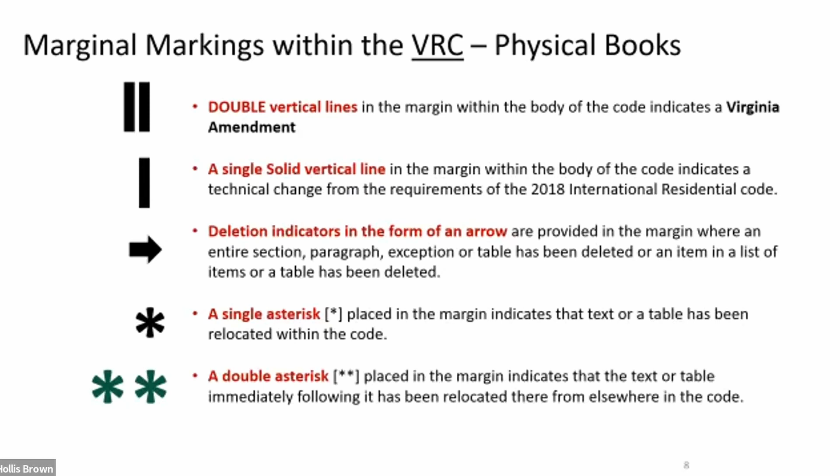If you're in the physical book, these are some of the markings in the margins. A double vertical line means that's a Virginia amendment. A single solid vertical line indicates a technical change to that section from the previous edition of the code. An arrow means that section or something in it was deleted. An asterisk indicates a table or text associated with that language has been relocated. A double asterisk, which is the first time I've seen that, placed in the margin indicates the text or table immediately following has been relocated. So that's something new.

If you're using the digital, online version, in addition to those markings, Virginia-specific amendments are shown in red type, and any changes from the 2018 International Code that weren't amended by Virginia will be in blue. Again, deletions are marked with an arrow.

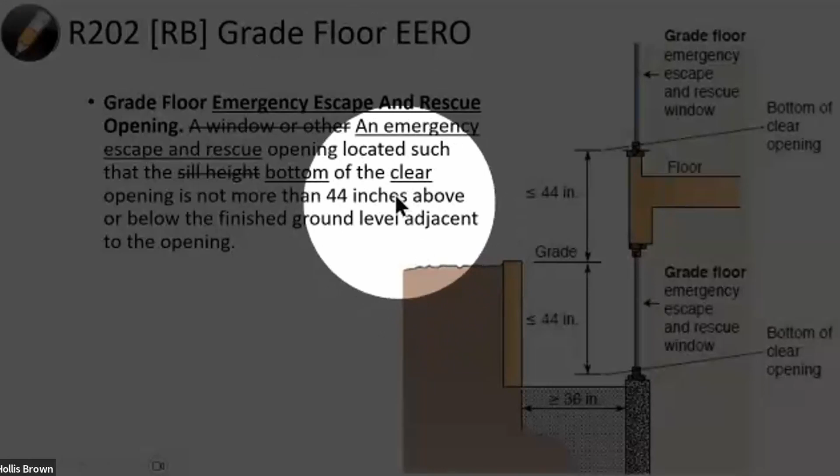All right, a couple definitions that changed. Here's what I was telling you about the language. When you look at a code change, that's what the language looks like. They will take, generally in today's technological advancements, copy and paste, then go through and underline where they've added new language and cross out old language. The pencil is a modification of the original.

Definition: an emergency escape and rescue opening, or EERO, located such that the bottom of the clear opening is not more than 44 inches above or below the finished ground level adjacent to the opening. In the 2012 code, that measurement was from finished floor to the lowest point of the net clear opening, and a lot of people tended to interpret that as the bottom of the sill, as opposed to the opening. So in the 2015 and 2018 editions, the language was changed.

That created a bit of confusion, so now they've gone back and created this language, which they claim will clarify things so there won't be as much confusion. This is in the definitions, not the technical section, but it's a good time to point out where it says less than or equal to 44 inches from the opening or the grade.

That's one of the requirements in the technical section about a window opening and what that net opening has to be. For example, if on the first floor you're less than or equal to 44 inches from that measurement to the ground, then you're allowed to reduce the net opening to 5 square foot. Otherwise, it has to be 5.7 square foot.

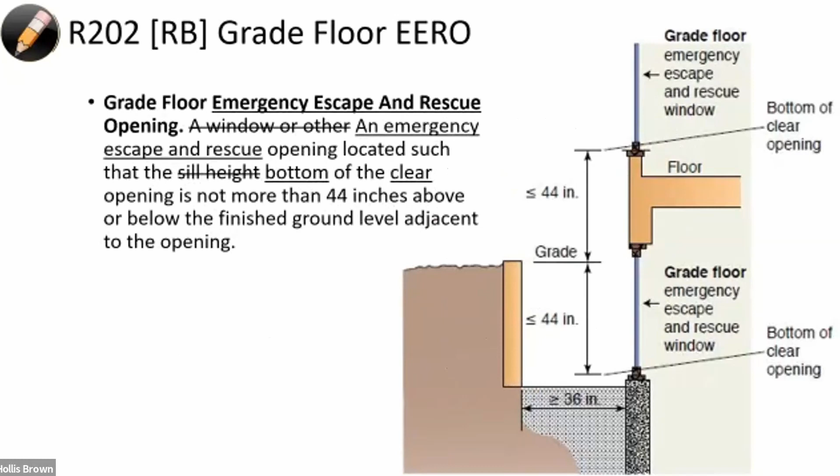One of the specifics would be, okay John, is it first floor? Is it basement? What's the distance from grade to the opening, the clear opening? Then I can answer his question. Because if I just tell him 5.7 square feet, that might be the wrong answer because it didn't take this into consideration. I know that can be confusing, and I don't want to confuse you, but I think it's important to point that out, and that's one of the slides that's good to make sure gets brought to your attention.

What I want to bring to your attention is that in townhouses, we were talking earlier about fire rated construction. In townhouses, this creates a zero lot line, so that has to have a fire rated assembly that separates townhouse 1 from townhouse 2, and the same thing from 2 to 3 and on down the line. That's called a zero lot line. There's another slide coming up that makes a change to the fire rated assembly, and I'll get more into that when we get to that slide.

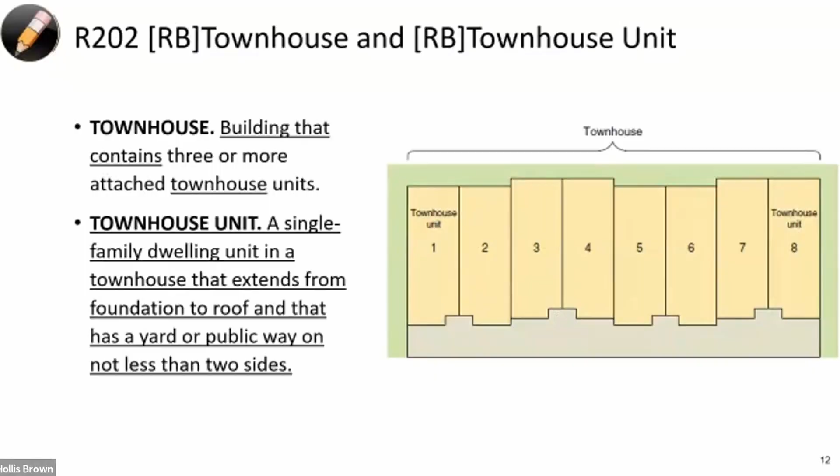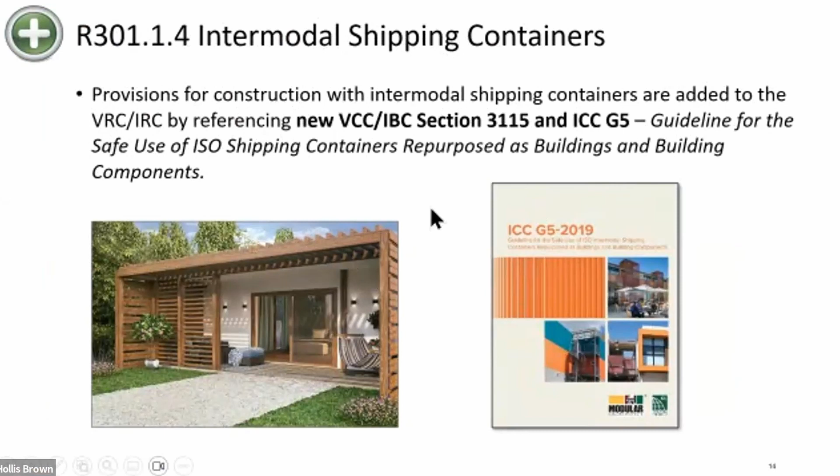It says that shipping containers used as buildings or structures shall be designed in accordance with section 3115 of the IBC, or in this case, the Virginia Construction Code, the VCC, which is the commercial version of the IBC, just like the VRC is the residential version of the IRC. One thing to note is that 'designed' means you have to have an engineer involved, so a structural engineer and architect has to design that use or repurposing in accordance with this section.

I don't know that you'll see a lot of that in Virginia, certainly not in this area. It's very costly to do that.

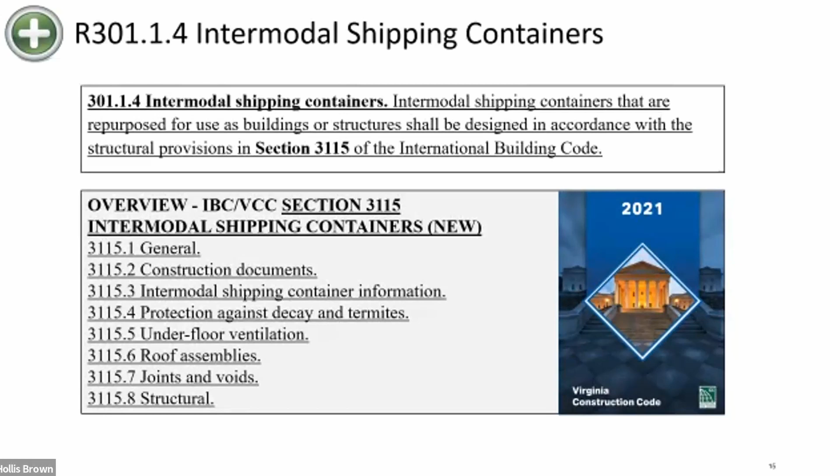I think one reason why that changed was because in a lot of localities, once you accept an engineered design - for example, in Chesterfield County, there's a builder that has a specific retaining wall associated with their poured wall for steps coming up out of the basement. They started that floor plan several years ago, and for each individual project we requested an engineered report. Then at some point our director said, well, we know what's in that report - why can't we just do an inspection based on what we now know and not require an engineered design? So in that particular case, for that particular builder, that's how we approached it.

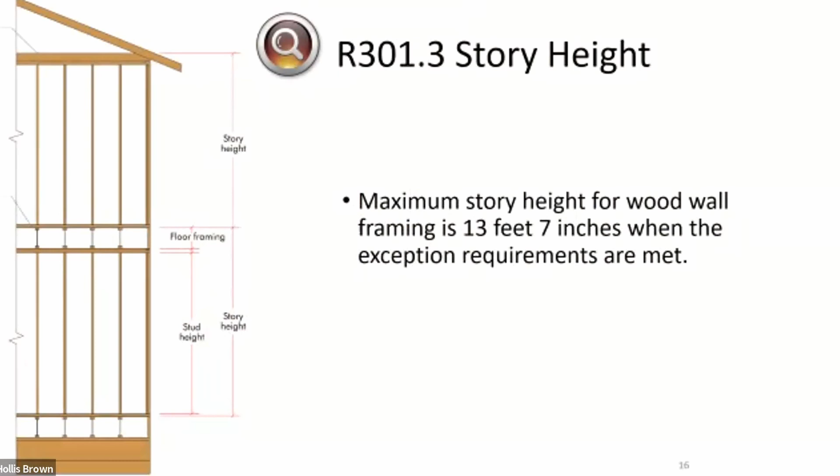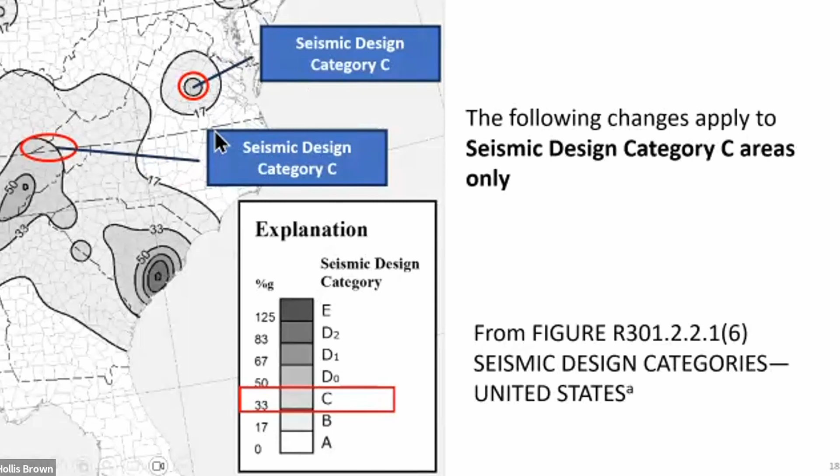This is the new change - it's a seismic category that was added. I think if you look at the map you'll see that's kind of the Louisa area - Powhatan, Louisa, Goochland, and Cumberland. Y'all remember the earthquake in 2011? The epicenter was Louisa, Mineral, Virginia. It destroyed a lot of homes. So I think that's kind of where this is coming from.

Only in townhouses, huh? That's weird. I've yet to see that, so maybe they'll talk about the old code.

Well, again, this is 2021, so if they're asking for the 2018, they would not have to do this. You might ask why only townhouses - I don't know, an earthquake doesn't know the difference between a townhouse and a single family dwelling, right? I don't have access to the actual code change, because in that they would put a reason statement, and I didn't have time to do the research. I apologize for that, but I question why a townhouse and not a single family dwelling.

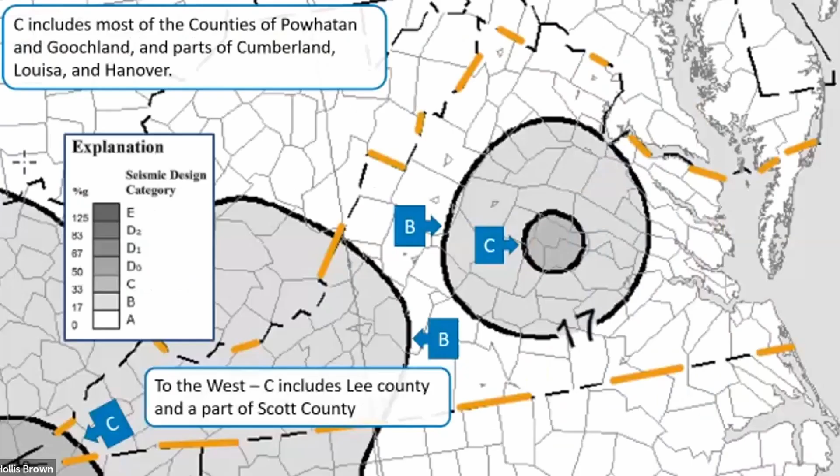In this particular instance there's a change, and that change is here. Historically, I think it was 2008, when townhouses were taken out of the commercial code, the IBC, and put into the IRC, it still required the exterior sheathing to be rated. So your firewall had to go all the way out to your exterior sheathing, and then on 4 foot of each side you had to have fire rated plywood or some sort of fire rated sheathing. Somewhere along the line that exterior sheathing requirement in the residential code only was taken out, so then your firewall just had to extend all the way to the exterior sheathing.

So now this is a subsequent change that says your rated assembly, which typically is core board - 2 layers of 1-inch core board - doesn't have to go all the way to the exterior, providing you do this 2-inch nominal lumber in that scenario.

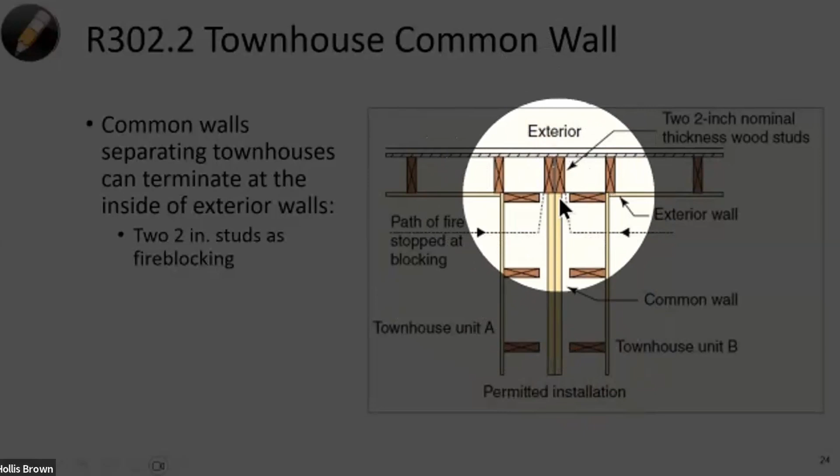Currently, under the 2018 code, it just has to be a solid metal door with a minimum 20-minute rating. If you're familiar with fire rated products, not much of anything is 20-minute, everything's 30-minute or greater. So typically the solid steel door you see in most new construction is a 30-minute door.

Now it has to not only be that fire rated door, but it has to be self-closing and self-latching. We were talking earlier about the commercial side, where now when you do something like this, all of your hardware, including the closure, would have to be rated as well. In this particular case, you don't. The code is kind of silent on that. So the code heads seem to say, well, since it doesn't tell you, then it's not required.

So the door has to be rated, meaning you can't have any glass in it unless it's wired fire rated glass, no openings. It has to be solid, and now it has to be self-closing and self-latching. And it doesn't give you... I think this is a mistake on their part, because it doesn't give you a timing for that self-closing, self-latching.

In 2018, the previous edition, they stepped that up. The problem they discovered was that if the whole house exhaust is on the other end of the home, and you don't have a window...

Sorry about that, I set my alarm. I don't know what's up with that. If you didn't have an operable window in the kitchen, then you were going to pull that exhaust and that fume from the kitchen all through the house.

So the 2021 code says that you have to have a whole house mechanical ventilation system, or a mechanical ventilation system capable of producing the required air changes in habitable rooms.

So you've got a choice now. You can either do a whole house system, or, using the kitchen as an example, you still have to do the whole house, but you can put a range hood that will exhaust the kitchen fumes and cooking odors and you'd be okay. Or you could do a ventilation system in each habitable room. Now, who would do that? I don't know, but that option is there.

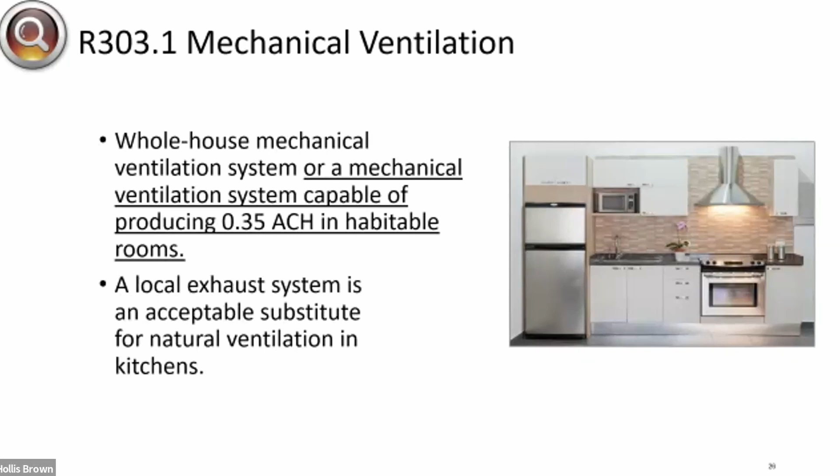So Larry, we got a question from the peanut gallery. Peter Onsbach is asking about it. Is this a code? He asked this when you had the previous slide up about garage doors. He wants to know if this is a code only on new construction. Yes, only on new construction.

If you remember in your NRS class, chapter 1, which is the USBC, the administrative portion, there's a section 102.3 I think that talks about the scope of the code. It tells you in a paragraph that this code, in this instance the 2021 code, applies to buildings and structures built now, new construction. Down at the bottom of that paragraph, it goes on to say, and this has always been in the code, even going back to the CABO days when I first came with the county in the early 90s, that however, if a home or structure was built under a previous edition, then as long as that hasn't been changed, it only has to meet the requirement that was in effect when that home was originally built.

And so if you go back in and you're going to replace like for like, you don't have to meet current code. You only have to meet, which would include maintenance, the code that was in effect when that home was originally built. We get a lot of complaints when it comes to re-roofing, replacing windows, because a lot of homes 20, 30 years ago didn't require, especially for re-roofing, drip edge or ice and water shield. So a lot of your contractors now, when they do a re-roof, meaning a tear off, they want to add in all of that.

And the insurance companies aren't paying for that because they've gotten wind of the fact that in the Commonwealth of Virginia, we have what we call a no retrofit clause, meaning as long as you're just repairing, maintaining, not adding on, not completely gutting the home and renovating it, you don't have to ever make it come up to meet current code requirements. You can just put stuff back right like it was. In the case of windows and doors, water heaters, furnaces, you might not be able to find that exact item, you may be forced to do something 90 plus or 95 plus efficiency.

But chapter 1, so having said that, long story short, this only applies to new construction. It does not apply for remodel. Now, there is a slide that's going to contradict that, and I'll leave that up to you when we get into the emergency escape and rescue opening stuff. But the answer to the question is, it only applies to new construction.

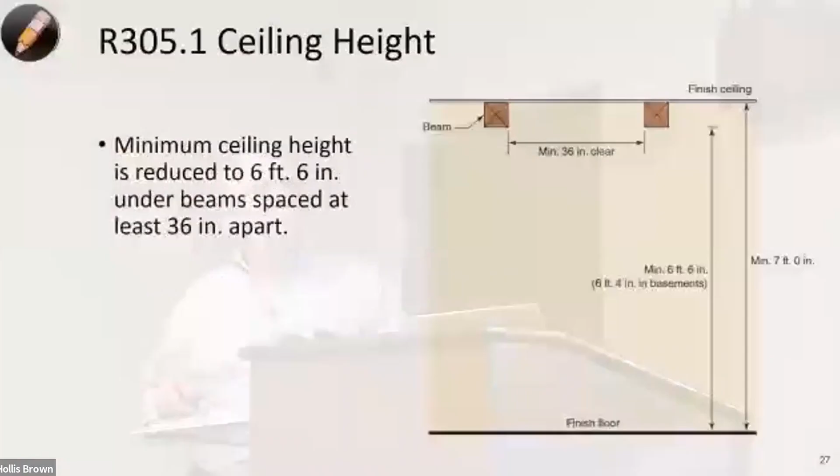All right, this is a requirement that has kind of been monkeyed with and changed. Prior to the 2000 edition of the code, ceiling height had to be 7 feet, but it did allow beams to project 6 inches below that ceiling height, provided they were at least 4 feet apart. Somewhere along the line in 2015, that exception included all areas, basements, finished, unfinished, or whatever.

So this requirement changes that to the minimum finish-to-finish horizontal dimension between the beams is 36 inches. And it notes that this requirement doesn't include basements, because that part of the exception in basements didn't change. So it doesn't matter whether it's finished or unfinished. If it's a basement, you can still get by with 6 foot 4 inches, and you can have the projections below that, but everywhere else, it has to be 6 foot 6 inches.

Now, let's take this a step further and piggyback on what we were just talking about, the no retrofit clause. Let's say a home was originally built with an unfinished basement, and now they want to come in and finish it. More than likely, the locality is not going to make them meet this requirement. They're probably just going to let them encapsulate whatever's there, ductwork, beams, whatever, and be done with it, even though it's now going to become finished space. I'm not speaking for localities, I'm just saying that's probably what's going to happen. They're not going to make them tear out the floor system to make something existing comply with the new code.

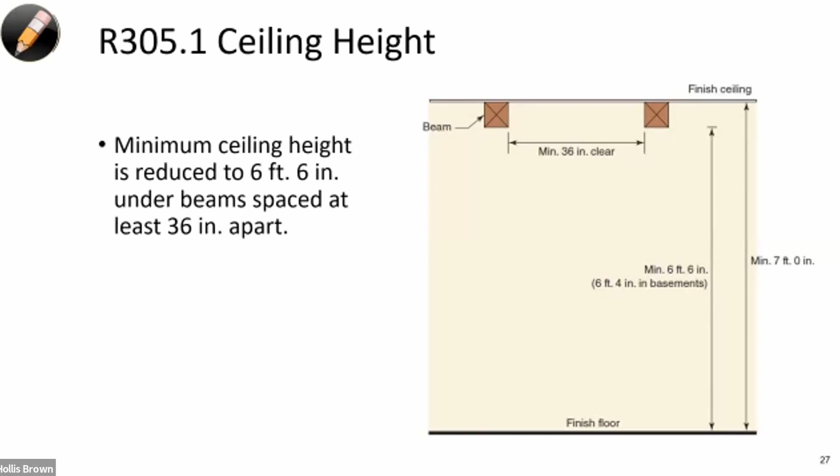This is a change. Emergency escape and rescue opening requirements. Emergency escape and rescue openings are now required to have an unobstructed 36-inch wide path to a public way.

This is a significant change to the residential code, because up until now the code in chapter 1 has only given authority for buildings and structures. So if you're out in the yard, you're outside the code unless you can determine it's a building or a structure. A good example: a pool is considered a structure, but a retaining wall for landscaping purposes, as long as it's not supporting the pool or any other structure, is just considered landscaping. It's out in the yard, it's just landscaping, no permit required, it's exempt.

So now we're reaching out beyond buildings and structures, and we're saying you have to have a 36-inch wide path to the public way. The definition of public way is a street, alley, or other parcel of land open to the outside air, leading to a street that has been deeded, dedicated, or otherwise permanently appropriated to the public for public use.

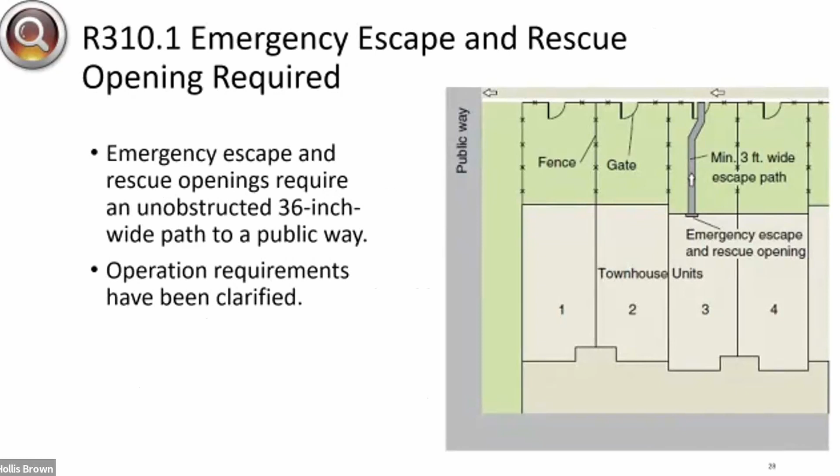All right, so this is just some additional language about that emergency escape opening. Now, under decks, porches, cantilevers, anything that could vertically obstruct, you have to have a path that meets that requirement: not less than 36 inches in height and not less than 36 inches in width. So that coincides with this—when you come out of that emergency escape rescue opening, you have to have an unobstructed 36-inch pathway to a public way.

So now if you're in a basement or coming out under a deck or something, that opening has to meet certain requirements, especially on the width, that coincide with that minimum 36-inch wide pathway to the public way.

And explain why they have an escape window in the basement where they normally have a door. Say that again, please. So their code is set up so that it's for a window coming out the back of the structure, correct? Out of the basement below ground. But normally in every townhouse I've ever seen, there's a back door on that level, which would be your emergency escape.

All right, so EERO, emergency escape and rescue opening, is not associated with all habitable rooms. It's typically associated with bedrooms, sleeping areas. So an EERO can be either a door or a window. If you have a bedroom in the basement that's open to that door, you can use that door as your EERO. But if you have a door on that bedroom that separates you from the main area leading to that exterior door, now you have to have an EERO in that sleeping room.

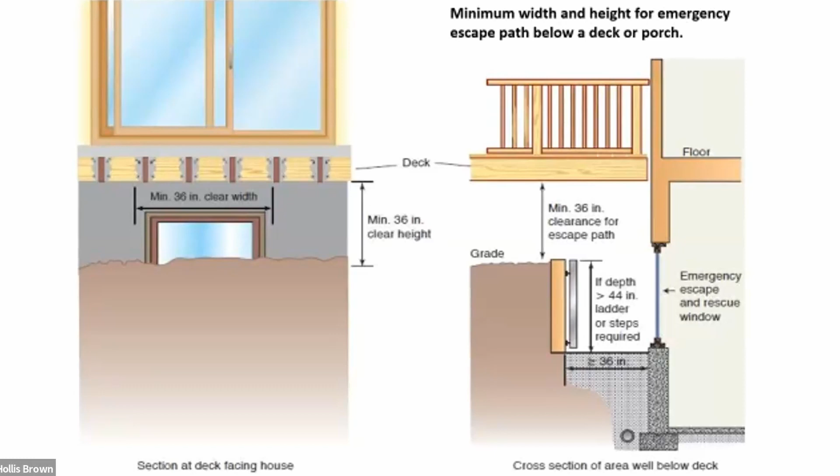All right, so this is talking about area wells, again, EERO, emergency escape rescue opening. Now they have dimensions for steps. The building codes typically said that you could have a well with a ladder. Now I guess this is kind of a modification so that now you can do steps, providing the steps meet these dimensions.

And again, there's that 44 inches that's showing up. No, sorry, there's the 44 inches, only this time it says greater than 44 inches, you're required to have a ladder or steps. So if you're less than 44 inches, that tells me that you wouldn't need something like this because somebody should be able to navigate up and over that without too many problems.

So be careful with this because these dimensions for steps or stairs are different than what you're going to find in the egress section 311 of the code for every other area that's associated with stairs and steps. So this is not main egress, this is just emergency egress.

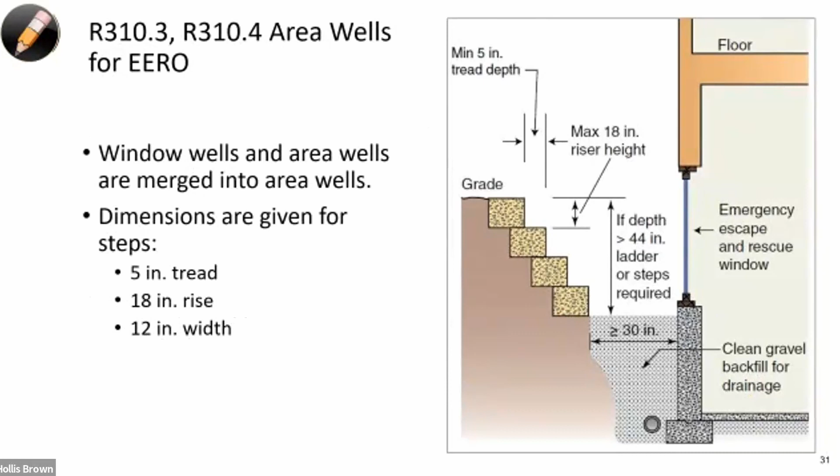You can't apply that to new construction, and I'm not so sure that this isn't going to get challenged because let's say I have an unfinished basement, and now the homeowner wants to come through and finish off that basement and make it put a bedroom down or a sleeping area down there. Currently, we require them to meet the other EERO requirements. This is now saying that in existing buildings, when you're doing remodel, you don't go to the section that requires either 5 square foot or 5.7 square foot. You're allowed to get by with 4 square foot.

But again, that's kind of in conflict with that chapter 1 that says, as long as you leave that structure in its original existing condition, you never have to make it meet current code requirements. Which flip side of that says, if you change something, whatever you change now has to meet the current requirements, meaning an addition or an unfinished space that's completely finished off. Unfinished meaning it's wide open, no walls, no barriers. Now you come through and you finish it off, you make a rec room, you put a bathroom down there, you put a sleeping area, et cetera. That's not existing, that's new construction. That's a change, change of purpose, change of use.

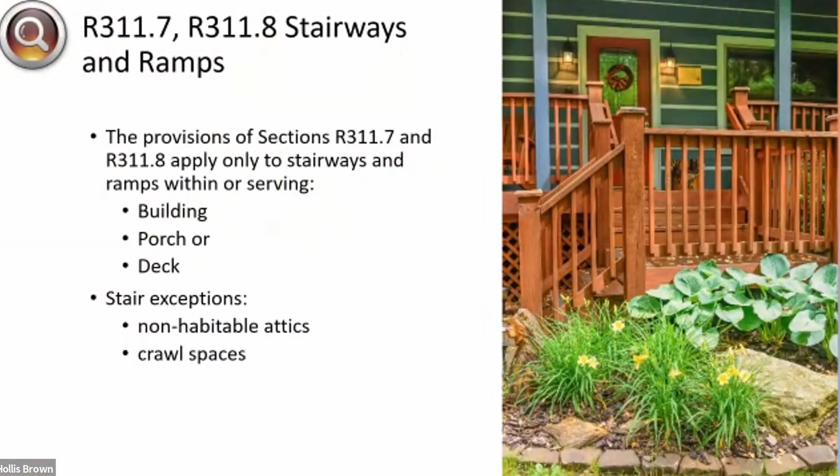This is a new exception that allows steeper slopes for exterior landings that serve to drain surface water away from the building. Previously, the landing that's required at the bottom of the steps at the grade could be level. Now it's going to require a minimum of 2% slope so that water runs away.

And back to that comment that I just made about buildings and structures, typically this is where the scope of the building code and the code enforcement personnel's authority stops, right there.

Window fall protection. Tim, you got your hand up again. What's that? Tim Fisher's got his hand up again. I apologize, I thought it was lowered.

All right, window fall protection. Early on, I mentioned less than or equal to 44, or greater than 44. So when John calls me and I need more specific information, this is what I'm talking about. Where's the window located? What's the distance from the opening to grade? So I'll know which section applies.

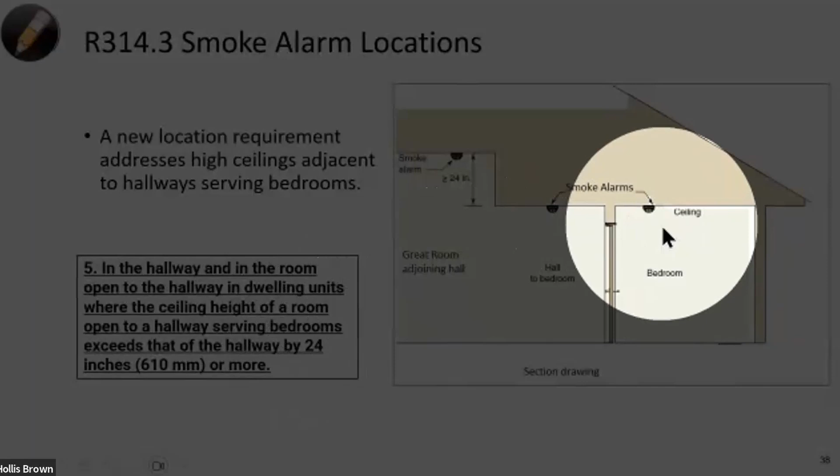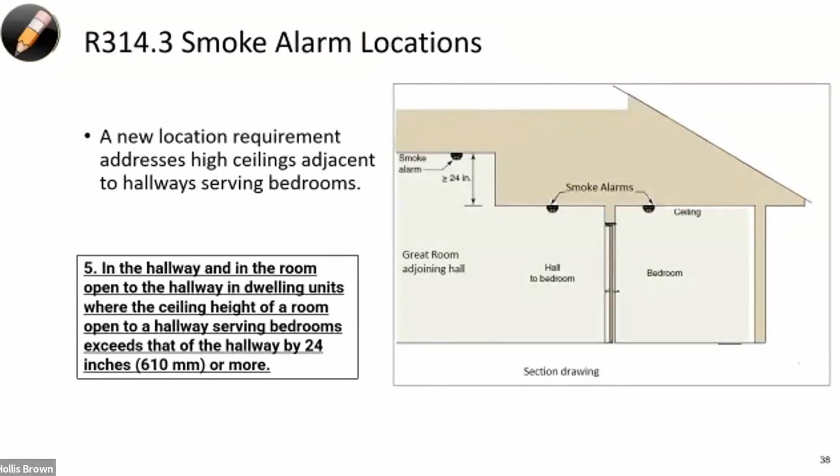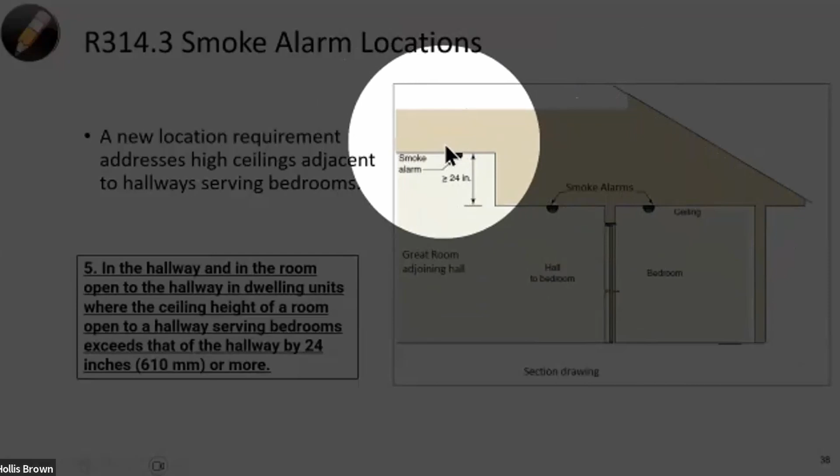Smoke alarm locations. This is an addition under the 2018 code. If it were a sleeping area, this says bedroom, but if it was a sleeping area, you would have to have a smoke detector inside that bedroom and outside adjacent. This section is now stating that if you have a hallway of some sort, and then you've got a larger opening greater than or equal to 24 inches for the room adjacent to that hallway, you now have to add a smoke detector at the highest point of that ceiling. So the way that would read is: you need a smoke detector in the bedroom, you need a smoke detector outside that bedroom door, and you need a smoke detector at the highest point of the ceiling of the great room.

Smoke alarms near cooking appliances. This is just kind of a change in the language. I'm kind of surprised to see this because the code has, over the cycles, gotten away from having requirements about smoke detectors and appliances, and it just says per manufacturer's installation instructions.

So now they've got a specific requirement that it's not permitted to be as close as 6 feet from the cooking appliance. So let's say you go out to do your new residential inspection and John goes out to do his inspection. I've come along and approved that because of this, but I didn't have access to the smoke detector installation instructions. John does, and John puts a note on his report that the manufacturer instructions say it can't be within 6 feet. If John wants to call me, I'll have a conversation with the builder; if not, that's something that could be handled between the buyer and the contractor. But typically, if there's a conflict between chapter 1 and the code, the most strict or stringent requirement takes effect. In this case, if the manufacturer specs say you can't be within 6 feet and the code says yes you can, I would probably tell the contractor, well, John's right - the data from the smoke detector manufacturer says you can't comply with that.

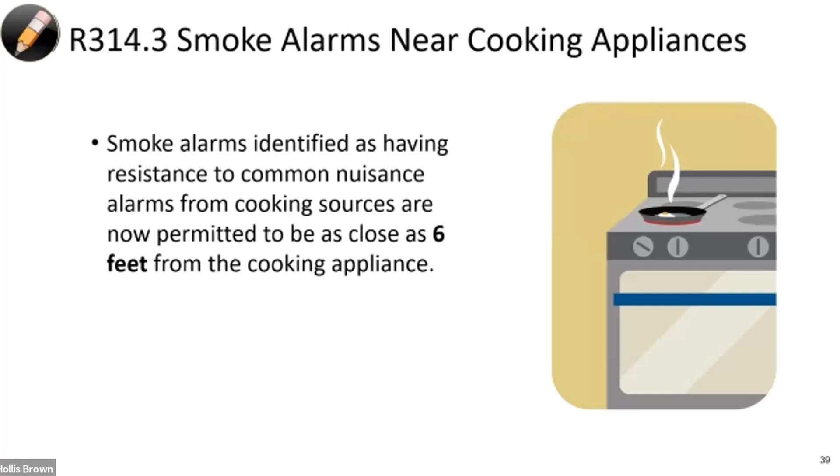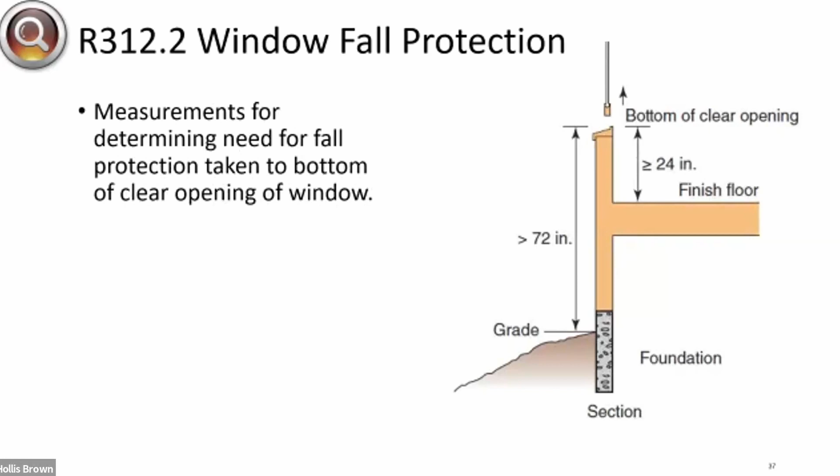Protection of wood against decay. This was clarified. The notes say that this particular section has not changed significantly over many code cycles. This update accomplishes a much needed overhaul, clarifying the requirements, cleaning up errors in syntax, and correcting some spelling and misleading text. So there are some areas and sections that have been deleted.

I've got a diagram in my notes. I don't know why the diagram's not showing up, but...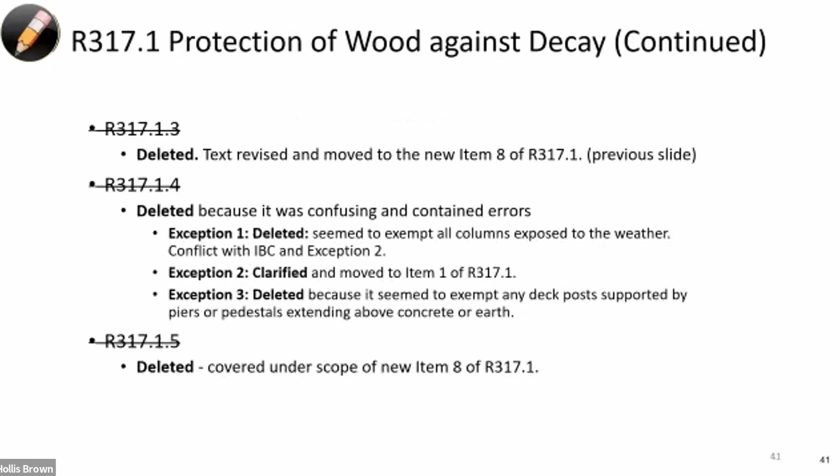The notes say that generally IRC buildings, residential buildings, do not require accessibility, and accessible features are optional. I wanted to point out that accessibility is different than the interior passage requirements found in section R332.

So when you're talking accessibility, it's ADA, handicap, full-blown kind of stuff. That's the definition of accessibility - federal code stuff, ANSI, stuff like that. Interior passage is something different, so don't confuse the two.

You know what I'm talking about when I say interior passage? There's a section in the same chapter, chapter 3, that says that if you got a bathroom located on the first floor, then you have to have a minimum 2/10 door to get into that bathroom. That's not accessibility, that's interior passage requirements.

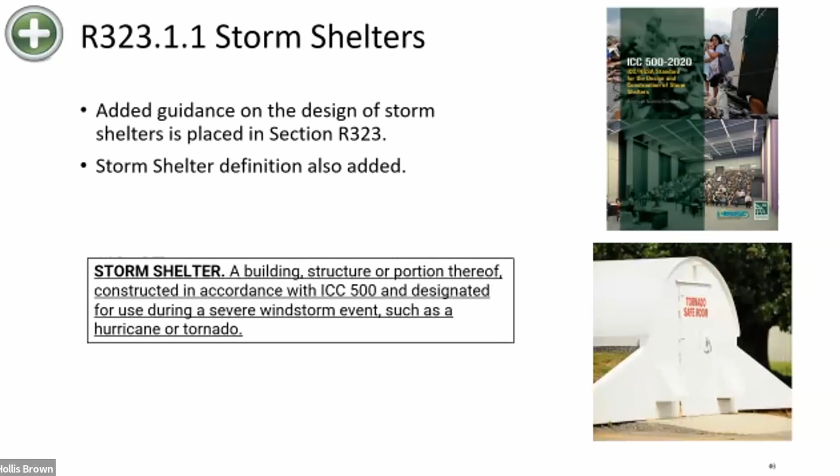There are some changes in this current code that wasn't in the previous code about fire department access that reduces some of the clearances. But with the advent of more and more people wanting to go green or get off the grid or whatever it is they're trying to accomplish, this section is becoming bigger and bigger. So keep an eye on this section if you're going to get involved in this, because there's some significant changes happening.

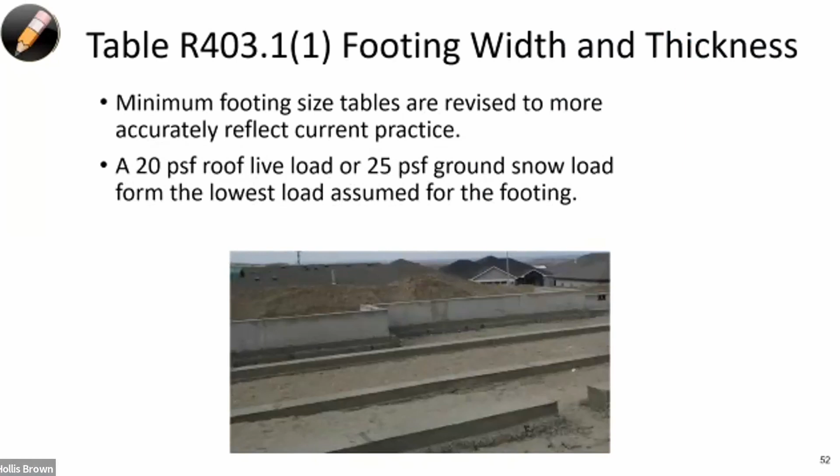Foundations, footing width and thicknesses have changed. A review of underlying calculations found minimum widths and thickness where loads assumed were incorrect. Therefore, the table has been changed. That's the table.

Keep in mind that this is for houses, additions. It's not for decks. There's a change in the table for decks too - we'll get to that shortly.

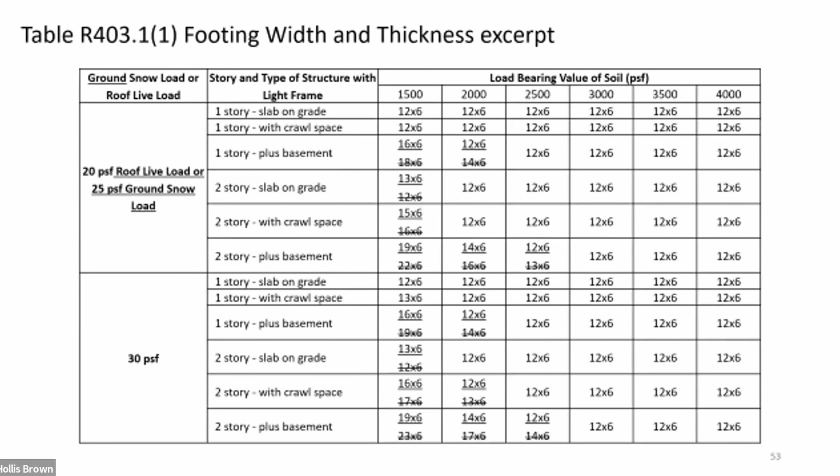Foundation waterproofing. There have been some deletions here. In the approved products column, 6 mil polyvinyl chloride and polyethylene products have not proven to possess the thickness or strength to be effective and durable, so they were deleted.

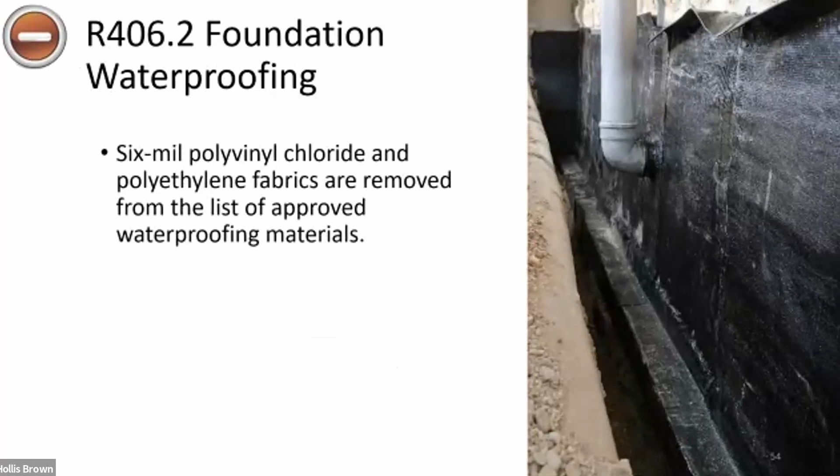Chapter 5, floors. Vapor retarders under concrete slabs, the minimum thickness has gone from 6 mil to 10 mil. Be careful of the requirements in the code because there are locations that are exempt from this - for example, garages to include attached garages. It's not required to have this. Utility buildings and other unheated accessory structures - most builders will put that poly down for an attached garage, but because it's an unheated surface, it's not required.

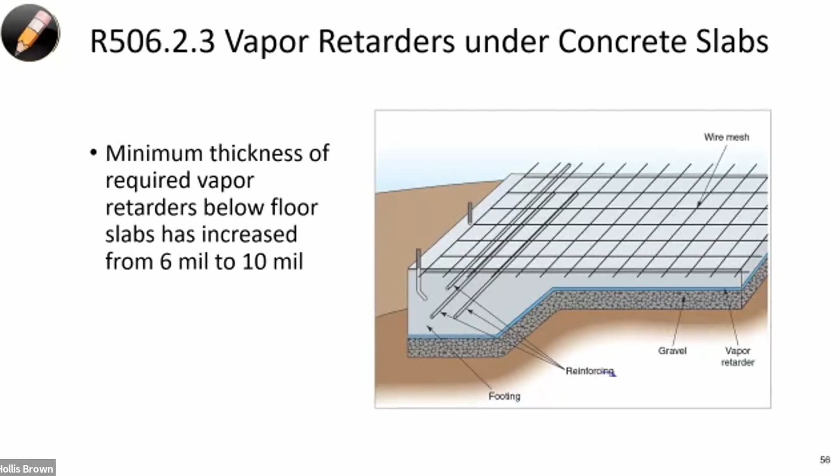Here's the deck footing requirement. In my notes, it says that there are 2 exceptions. Exception 1, joists supported on grade do not require footings. Most localities, I think, would consider that a patio. So we've just kind of let that go.

You don't even need a permit. So you build a wooden deck right on grade. Now, the code says, okay, we recognize some are going to do that, no footing required. Exception number 2 says a small deck low to the ground may use concrete piers as footings directly supporting the joist on grade. I think that's going to cause a lot of problems because what's the definition of a small deck low to the ground?

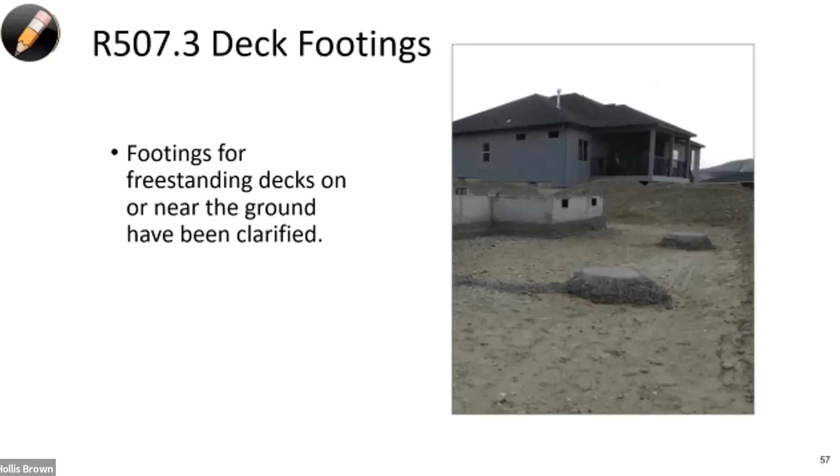I bet if you polled everybody listening to this, you'd get however many people in this room plus the 39 people joining us online, you'd probably get that many opinions, like 42 opinions, about what a small deck low to the ground is. So I think that's going to be a problem.

So when you encounter that under the 2021 code, I would encourage you to contact your local building inspections office and ask what their definition is. And then let that drive how you look at it.

How many know what tributary area is and how to calculate it? The definition of tributary area in square feet is different than just tributary area — you take the measurement halfway from one support to the other, then multiply that by the width, and that's your tributary area in square feet. That's why I think this table is going to cause problems, because I have trouble calculating that myself. How's a contractor going to calculate it?

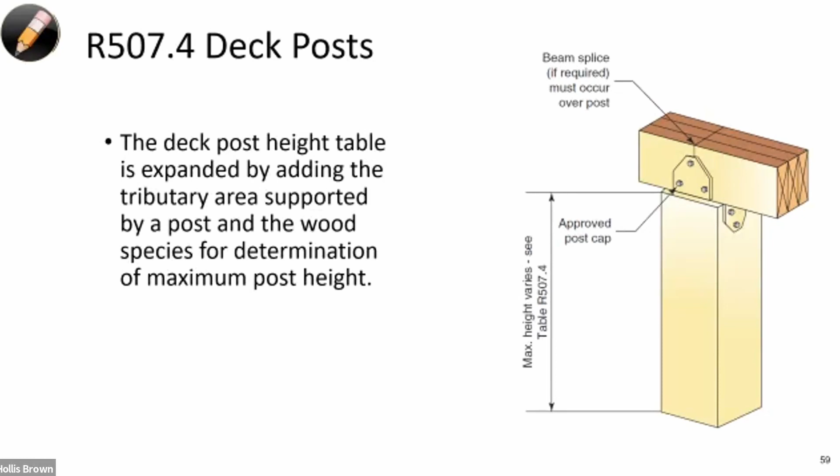To understand the prior point, if you had your small low-to-the-ground deck, whatever that is, you don't need a proper footer pier — you can just buy some piece of concrete and plop it on the ground. Yes, that's what this is telling you.

It's amazing. Well, that's a good point, back to Chapter 1 and the regulatory authority. We, the inspection staff, boots on the ground, don't write the code — we're required to enforce it. And there are a few things that have come along in my 30 years that I haven't agreed with, and I've been told point blank by my supervisors and my boss: I don't care whether you agree with it or not, it's in the code, you will enforce it. Or it's not in the code, so you can't enforce it.

I should have brought along a copy of the code book that was in effect when I first went with the county back in 1992 — it's about that thick, and oh by the way, it's only that. Well, look at this code book now. I don't know how many times that code has grown. There's a lot going on in that book, a lot that us and y'all have to be responsible for if you're going to do new residential structure inspections. And when you've got 116 new requirements from one code edition to the other, it's getting to the point where it's unmanageable, I think. Which is another reason why I decided to hang it up.

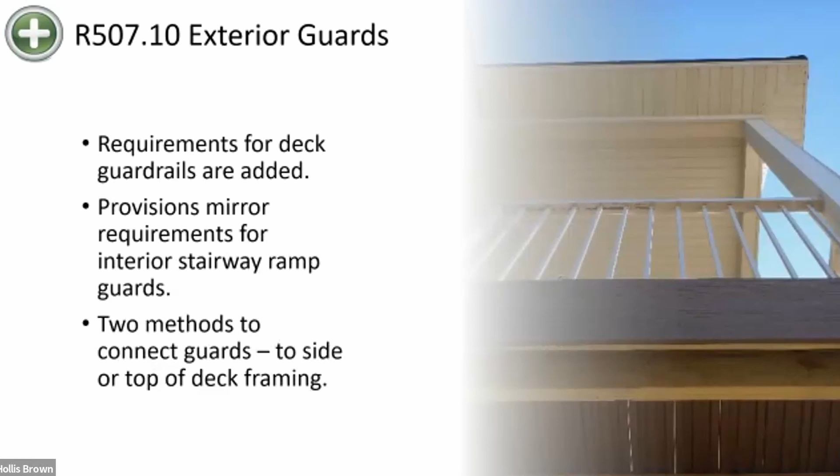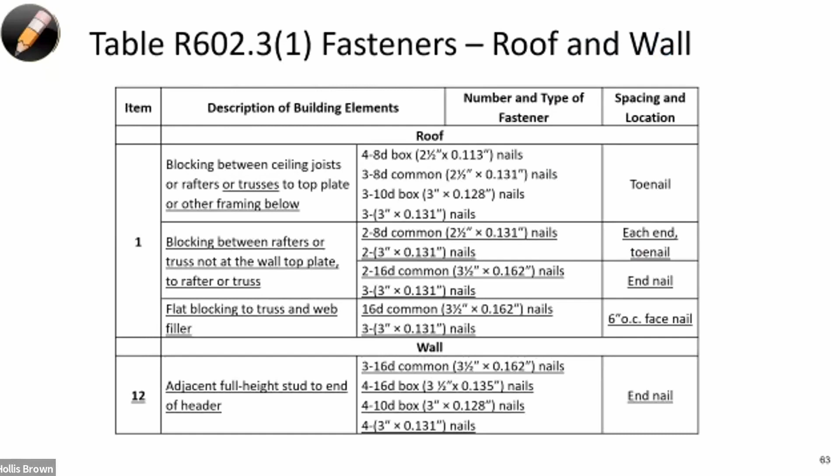Wall construction. There are some changes to the table for fasteners for roof and wall. This particular table addresses wall, and this particular table addresses roof sheathing.

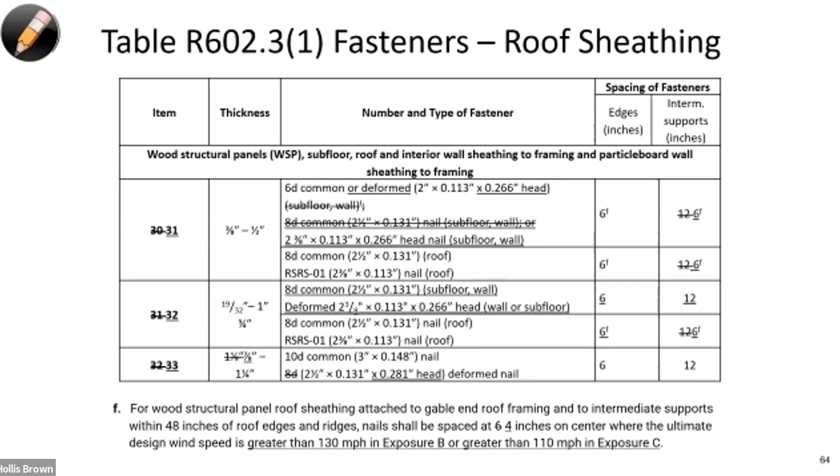There's a change to the cripple wall requirements. Cripple wall requirements only apply to exterior cripple walls here.

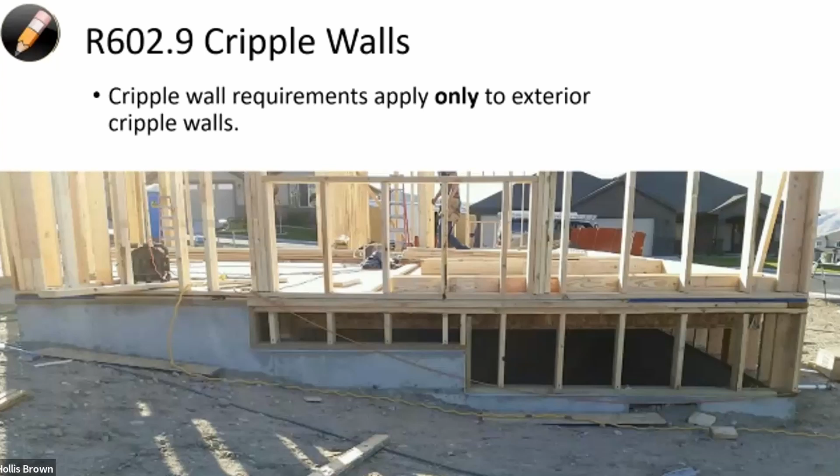The notes say that the requirement for continuous sheathing on cripple wall studs with a height less than 14 inches is intended to ensure the integrity of the studs when nails are end-nailed through the top and bottom plates. I'm assuming the reason they now want that is because of racking and lateral movement, to stiffen up that wall so that doesn't happen.

Wall coverings, this says I'm halfway through. I'm supposed to wrap this up at 9:45, right? You have 20 minutes. All right, let's see what we can do.

Vapor retarders. It's been reorganized to clarify and ease of use. The one thing I want to point out is, for the most part, we're in region 4.

I've got a slide coming up that shows there have been additional regions added to Virginia, but vapor retarders are not required in the Commonwealth of Virginia for the most part in region 4. The purpose of a vapor retarder is to go on the warm side so that it prevents moisture from moving through and meeting up with the cold air.

Well, in this area, region 4, we pretty much have equal heating and cooling days, meaning half the year you've got the air conditioner on, the other half you've got the furnace on. So there's really no need for a vapor retarder, because if you're going to go by the logic that it has to be on the warm side, half the year it needs to be on the inside, the other half of the year it needs to be on the outside.

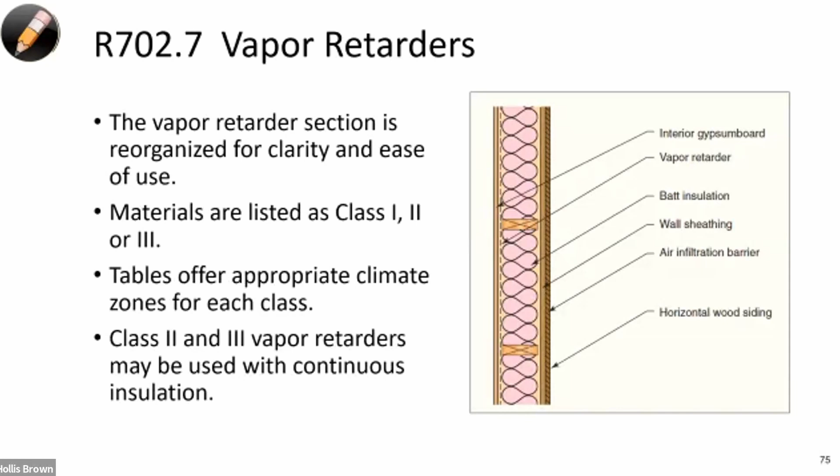So that's Tyvek paper? Nope, Tyvek is an air barrier. So you're saying tar paper? Tar paper, plastic, roll-on membrane, anything that is moisture impermeable. It won't let moisture through.

The problem is a lot of contractors try to use Tyvek as part of their flashing, but Tyvek lets water through. I've never understood how it can let water through but not let air through. On a personal note, we require them to put Tyvek or house wrap.

Tyvek is like Xerox, it's a proprietary word. We require them to put house wrap, then we allow them to put all these massive staples and fasteners. So what good is the air barrier doing, right?

What's that? Tyvek says you have to tape them. Yeah, well, how many people are going to tape all those fasteners, right? You can hardly get them to tape the seams. You're also not allowed to staple it anymore, you have to use one of those cap nails, again per manufacturer's installation instructions.

This is just a slide that describes what class 1, class 2, and class 3 is.

Tie attachment and airspace. There's a slide coming up that would probably better explain this. You're probably not going to see this in residential construction, primarily commercial construction, because the reason for this change is to increase the gap behind the airspace between the veneer and the substrate or sheathing, so that you can install insulation to get your R-value requirements and have it on the exterior of the building, not the interior. And if you notice, there are a couple other changes on this diagram.

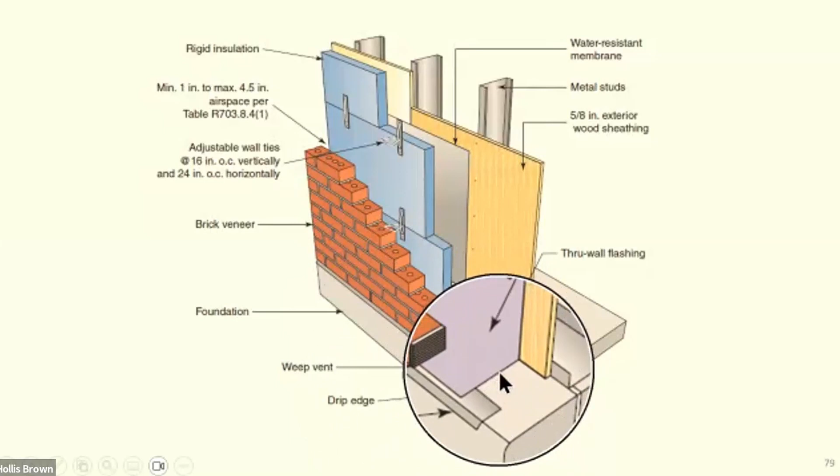Nobody in the residential world uses this, that is a commercial product. And then how many contractors are going to have the forethought to increase their projection on their footing to include all this additional, right?

So I don't think you're going to see this residentially unless you've got a high-end builder, or unless you're in an area that is trying to obtain some sort of green energy requirement. And the only way they can do that is by putting foam board on the exterior.

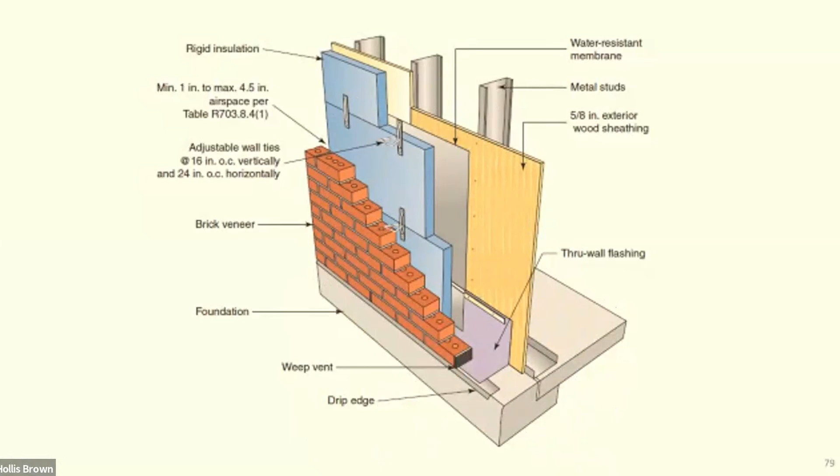Soffits, requirements for soffits have gotten more stringent. There's a new section, and here's the overview of that.

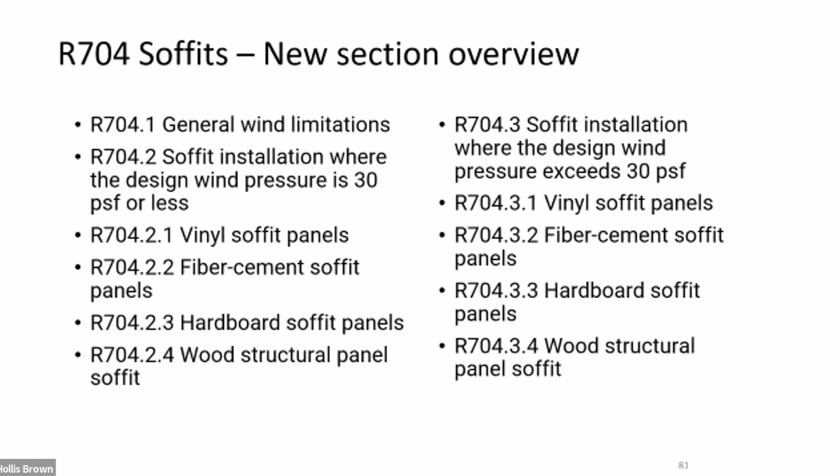This has been generated because of the study in high wind areas, that as long as the building stays intact, it will resist the wind and the forces. But as soon as you start to remove cladding and allow wind into that building, you're starting to cause a problem. So in the notes, it says that in the study, there's been a lot of soffits that have blown out, which allowed wind to get in, and then the building just kind of implodes or explodes. So here's an example of what's required now.

All right, Larry, you got your hand up. Yeah, so are you saying that a porch roof with a vinyl roof, vinyl soffit, has to have solid sheathing? When you're up in the attic, you can't see that white glowing, just plain vinyl, and there has to be solid sheathing there?

No, that's not what this says. What this is telling you is that you can't just put a piece of J or F channel up and pop your siding in and let it just kind of float freely. That siding has to be secured, or that soffit has to be secured now.

And the only way you can do that is by adding nailer strips, depending on the unsupported span per that section, which is probably based upon manufacturers. So the nailing strips are going to hold that entire vinyl soffit in place during a hurricane. That's the intent, yes.

Yeah, there's no whether that requirement works in real life or not, I don't know. But that's the intent. Okay, thank you.

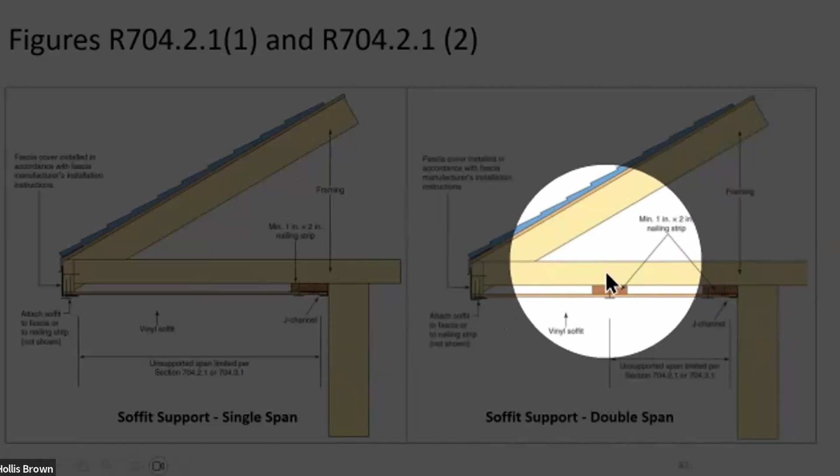Back over here, if it exceeds 12 inches using that same logic, then you're going to have to put a nailer at the intersection of the wall and a midspan nailer so that you can attach your siding to that nailer. Every piece of siding would have to be attached.

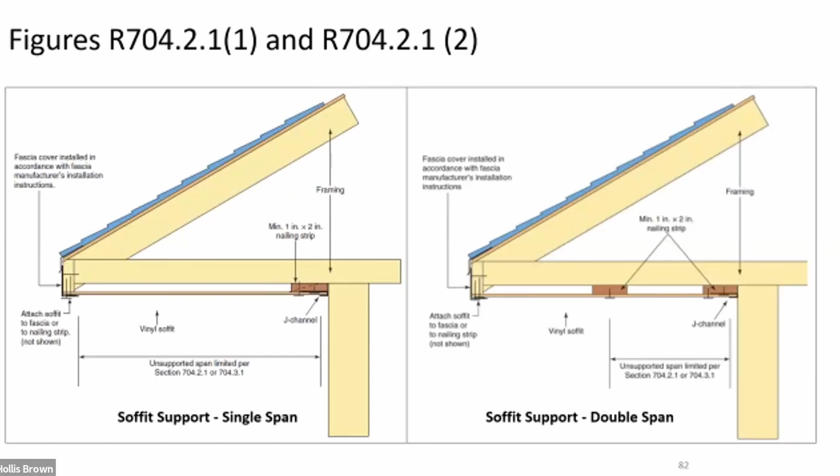And I guess the thinking or the logic is that when the wind comes along, now that siding is more secure, it won't blow out, which won't allow wind into the home or won't allow the pressures to change. Because typically that's what happens is the pressure changes. Unless you get a direct wind load, the pressure change is more of a hazard than the actual wind load. But once you've opened that home up and subjected it to the 70 or 80 mile an hour winds, now you've got a problem where you've got to keep that fastened, attached diaphragmatically so that it doesn't lift off and blow away. So this is just a precursor to that — let's keep the wind out, just like let's keep the water out, and hope that works so that it at least minimizes the damage that could occur while the storm is passing through.

Here's a chart that tells you what those minimum spans are.

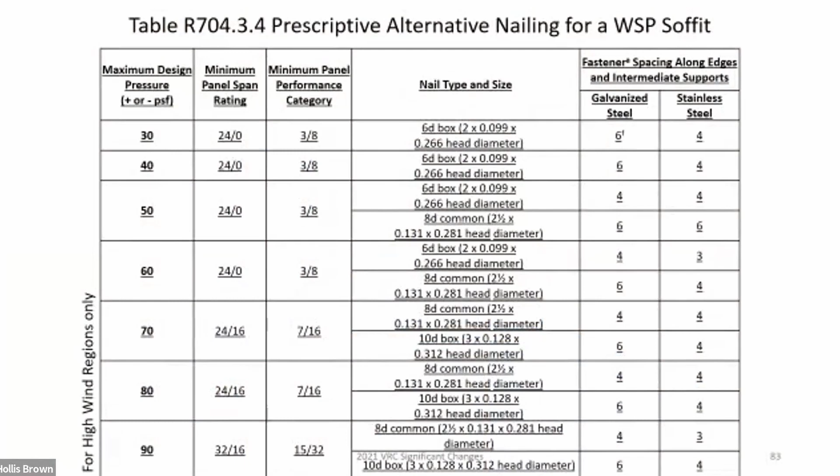Roof and roof covering. So as I just mentioned, there have been some changes to the heel joint connection, both in a positive and what I think is a negative way. It's actually reduced some of the nailing, but in other areas, it's increased the requirements.

And that is, when you start at the foundation, your foundation is attached to your footer, your building is attached to your foundation, the floor is attached to the foundation, your walls are attached to the floor, the roof or the second, third stories are attached to the walls, and then the roof is attached, and it becomes a diaphragm. Meaning if you push on one side, the whole thing is supposed to act together and distribute that load.

The representation that was given about the Francis Scott Key Bridge was people questioning why did that whole 1.5 mile span drop. Because from an engineering perspective, you hit one pylon, yeah, it should have distributed the load, but the whole thing shouldn't have collapsed.

I'm hoping the investigation will give some additional information, because that's the purpose of all this stuff, especially in buildings and structures: you create a diaphragm, meaning it becomes one piece. When you affect one portion of it, the rest is supposed to act in accordance with whatever those shifting loads are, supporting it so it doesn't fail. Back to the cripple wall thing, I think that's part of why they now want sheathing on cripple walls, so that when you get lateral wind pushing against it, it doesn't want to rack. It wants to support, stay rigid, and stay in a diaphragmatic manner.

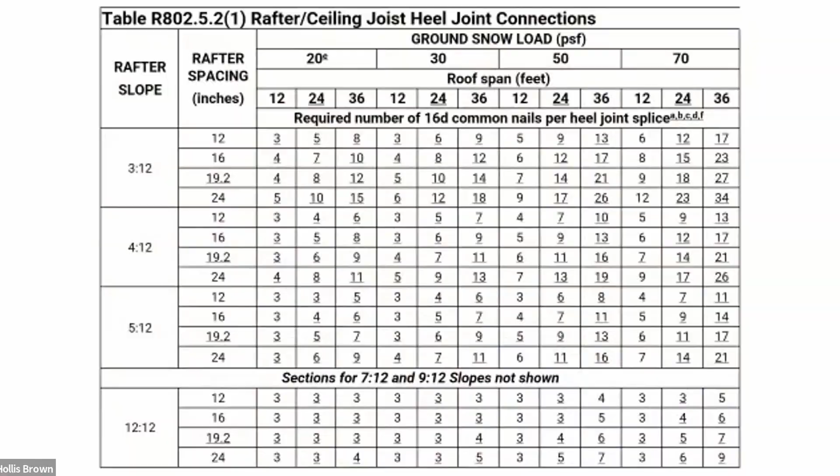This is the revised table for the heel joint connections. Energy - over the cycles, there's been more and more energy stuff that's come into play.

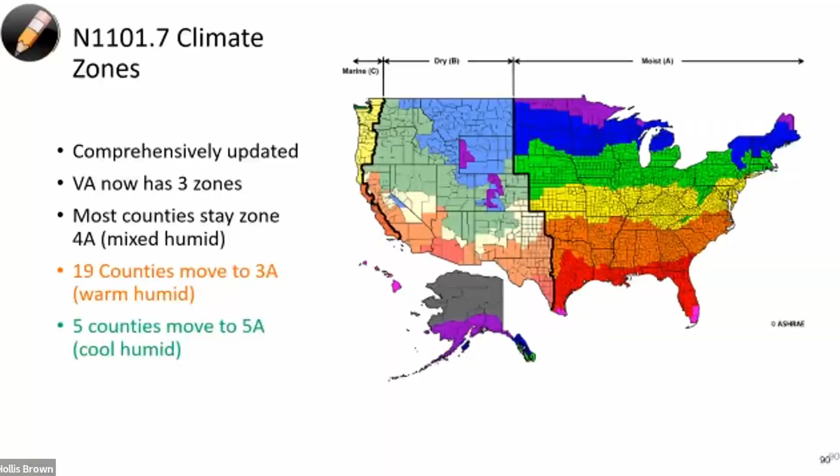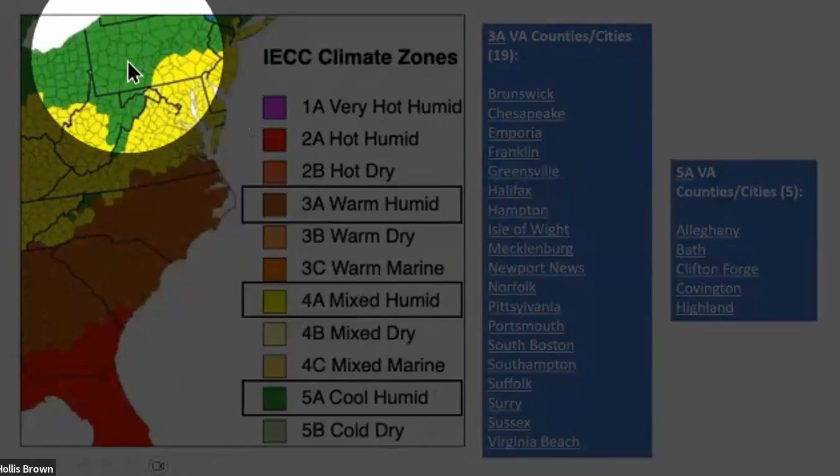So in Region 4, a vapor retarder is not required, which is why you will see unfaced insulation in a wall or ceiling. You'll also see faced insulation, but it's not required in Region 4. That's because Region 4 is designated to have equal heating and cooling days. So if you follow the scientific logic, half the year you need a vapor retarder on the inside, the other half of the year you need it on the outside.

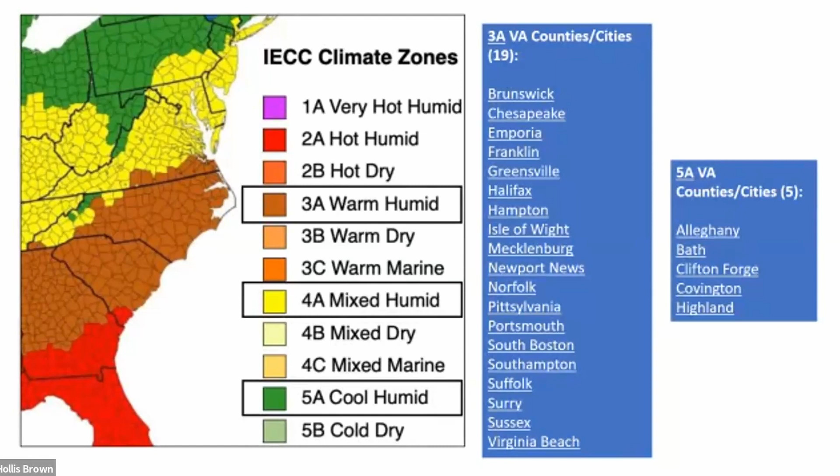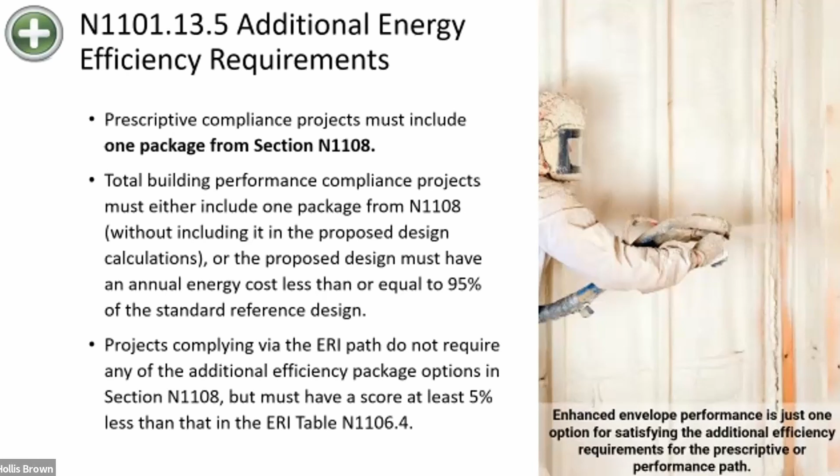The other thing that's come in, I don't know that you're going to see this, but for the longest time the residential code has been prescriptive. The way it was explained to me was it's kind of like a cookbook: you start with raw ingredients, and by the end of the recipe you've got this nice, delicious thing you've baked or cooked. That's prescriptive. The commercial code, on the other hand, has always been predominantly performance, meaning the architect or engineer determines how they want that building built and how it's supposed to perform. So you can get a bunch of trade-offs. You can't do that in residential construction. This is going to probably allow contractors to start moving towards performance, meaning they don't want to put R60 in the ceiling - they want to do R40 or 38, and then ramp up requirements somewhere else to compensate. That's performance. The problem with this is...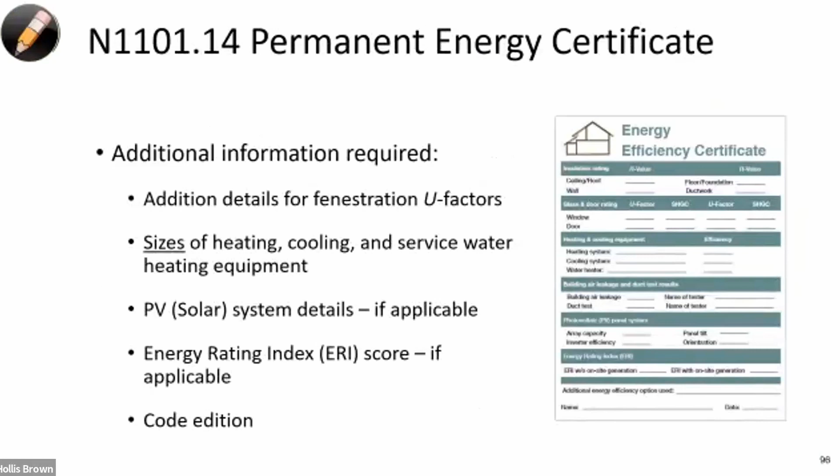There's a change here where we're now going to talk more about U factor versus R value. That's going to be a little confusing because U factor is a scientific approach, whereas R value is just a number. U factor is thermal transmittance, which equates to heat transmission through a building component based upon a time rate per unit, whereas R value is the inverse of U factor - it's a measure of resistance. So when you look at insulation and it says R15, the resistance value is 15. That's fairly simple. U factor is like 0.35 - you have to calculate some of that, and I don't know how to do that. I'm certified to do energy inspections as well as energy review.

And part of that is if you don't use it, you lose it. But the other part is a lot of this energy stuff is designed and put in there by engineers. I am not an engineer, and I don't think like an engineer.

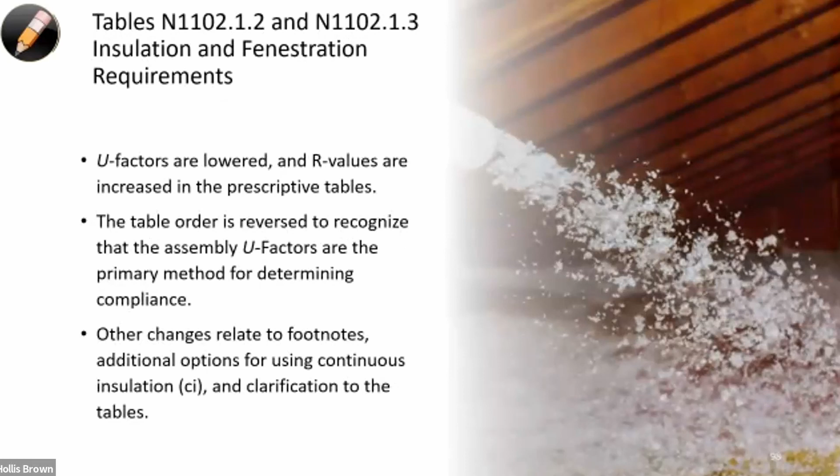Ceiling insulation - the purpose of this slide is to bring to your attention that we're going from 49 to 60. The 2018 code said that when it went from 38 to 49, the insulation now has to go over the top plate without being compressed. So basically you've got a continuous pathway from your thermal envelope in your wall into your rafter cavity if you're doing a sloped ceiling, or into your flat ceiling.

Now they're going to 60. R49, here we are 3 years later - you talk to Quality Products or Lehman Brothers, they'll tell you they order 3 truckloads of 49, they might get a half a load. I don't even know if the industry is making 60. So I don't understand why in the Commonwealth of Virginia we would go with something like R60 when you can't even get 49.

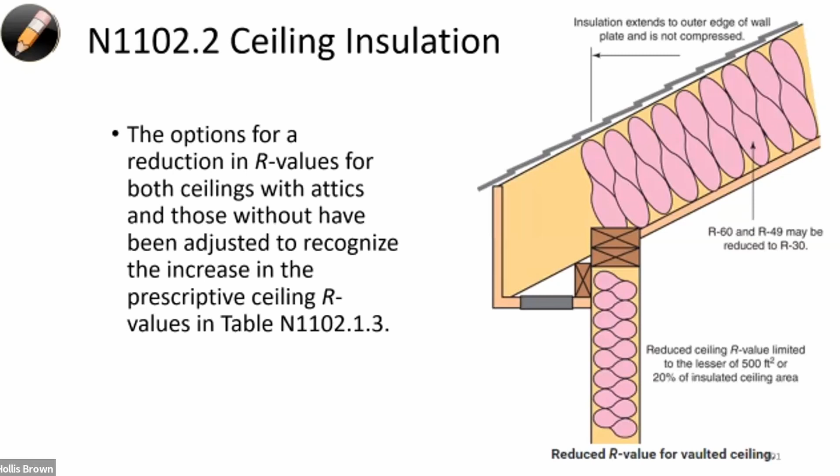But two things there - the 2021 code goes up to R60 in the ceiling, and it still has to go over the top plate without being compressed. So R49 is 15, 16 inches, not compressed. So what's 60 going to be? What's that going to do to the framing of the soffit area? My mind doesn't make sense of that, right?

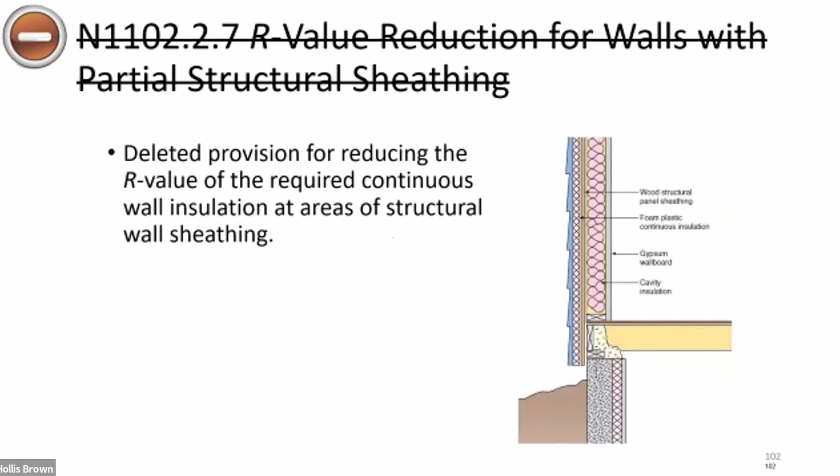Few minutes - I might be able to make it out of this in 2 minutes.

Floor insulation - there's 3 methods of compliance now. Previously, the insulation had to be in contact with whatever the wallboard or whatever the flooring was. Now you're allowed 3 different ways to accomplish that.

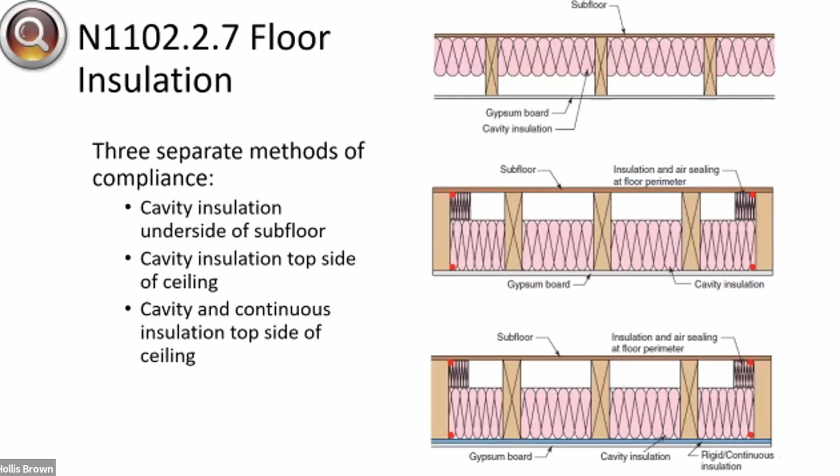And then an unconditioned basement - you heard me mention earlier, there's nothing in the code that talks about finished versus unfinished, but there is requirements and definitions to talk about conditioned and unconditioned. So if you have an unconditioned basement, meaning there's no HVAC, there's no conditioning of the air, not heated, not cooled, either - then this is now how you have to insulate the basement.

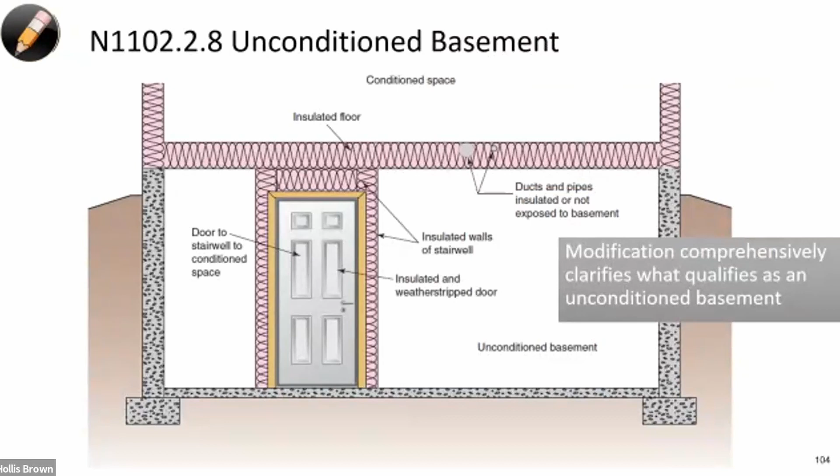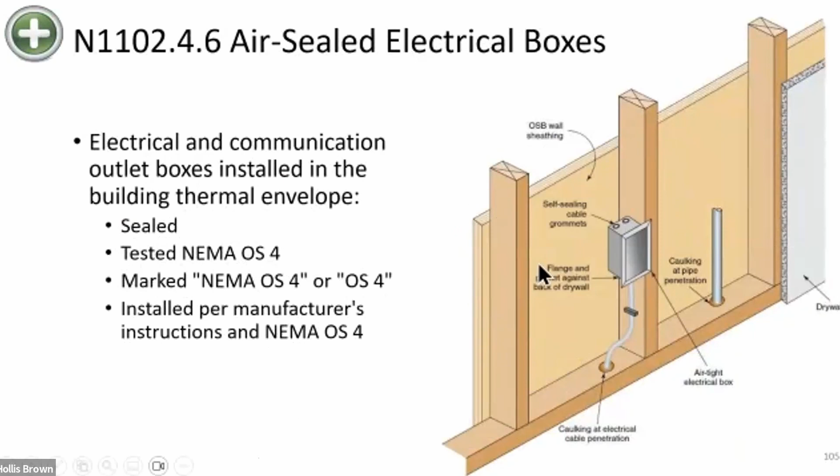Air sealed electrical boxes - this is a new requirement. Not only do the boxes have to meet a standard, but they're going to have to be installed properly and be sealed so you don't have the air moving around.

Back to that floor insulation, there's some requirements in duct insulation that incorporate that. So now if your duct insulation is in your floor system and it's completely within the thermal envelope, it doesn't have to be insulated to all those R values that are in the mechanical code.

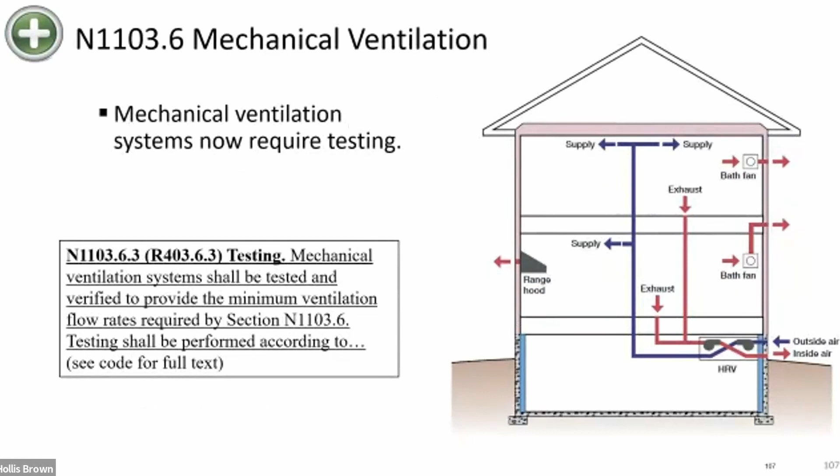Mechanical ventilation now requires testing, which means I think balancing and stuff like that.

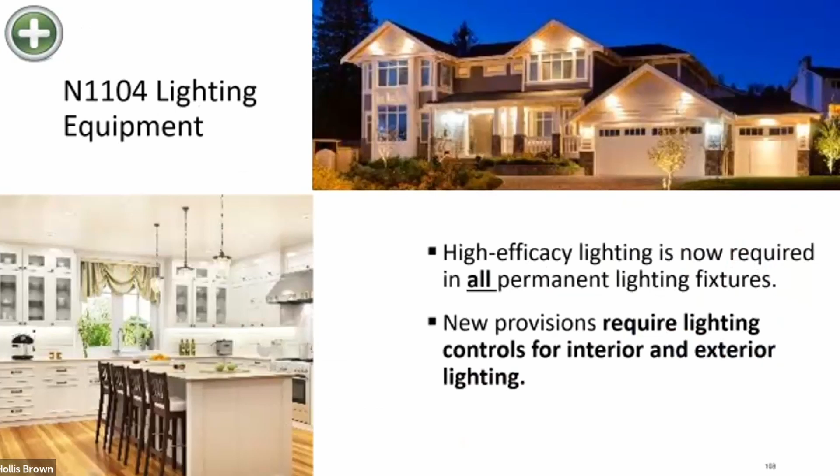Lighting equipment - high efficacy lighting is now required in all permanent lighting fixtures. It used to be a percentage of bulbs had to be high efficacy, and now everything has to be that way.

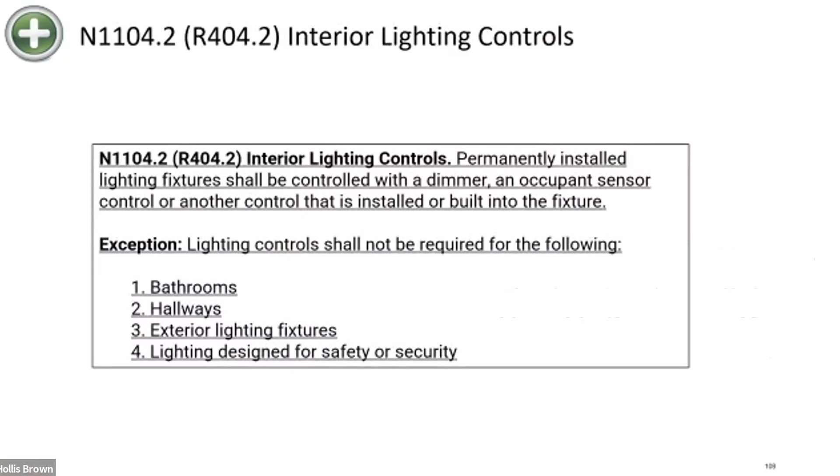Interior lighting controls - these slides we're going through now are another reason why I think contractors are going to request the 2018, not the 2021. This stuff is expensive, very expensive. So interior lighting controls are required now, so that when you walk into a room, you've got an occupant sensor there, the lights go on, lights go off. You don't have to flip the switch anymore. There are some exceptions.

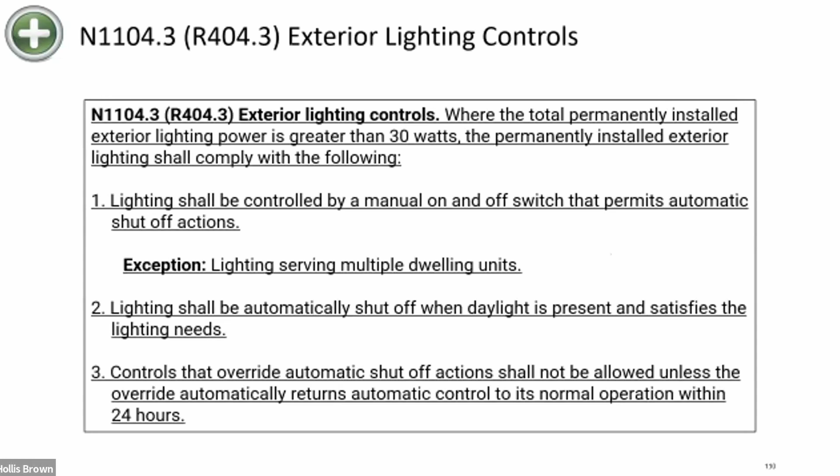Exterior lighting controls are incorporated into that with some exceptions. You see a lot of this already in commercial buildings. In fact, it might even be in here, where you walk in, the lights come on, and then after a certain period of time, when there's no movement, the lights go out.

It'll also include mechanical equipment. You may have to upsize your mechanical equipment. You may, depending on the location of your ductwork, have to insulate it in a different manner, more of an R value. And then you and I, unless we're a certified energy analyst, we can't verify and submit the report that's required for that. It has to be done by a certified energy analyst.

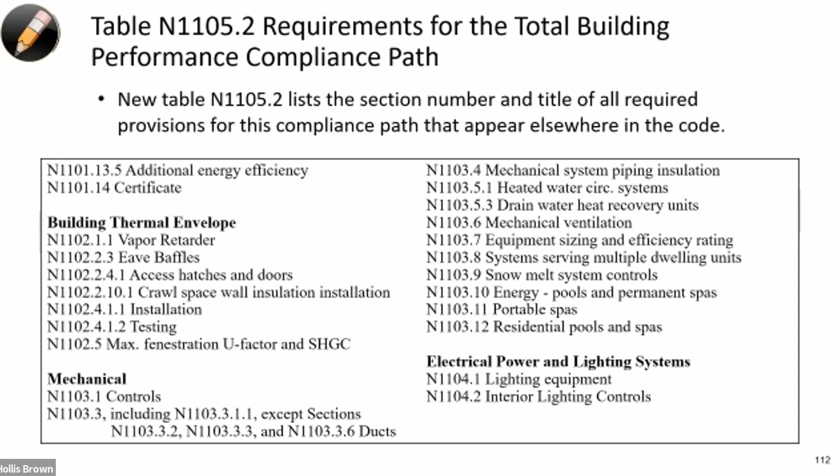There's the requirements for total building performance - it's a long laundry list. See where it says mechanical and electrical. So it's not just the insulation or the air barrier, the vapor retarder - it draws in your components and your equipment as well. And that gets to be very expensive.

All right, I think my time is up, which means we're not going to get to the mechanical, plumbing, and electrical. So sorry about that. Thank you, Larry.